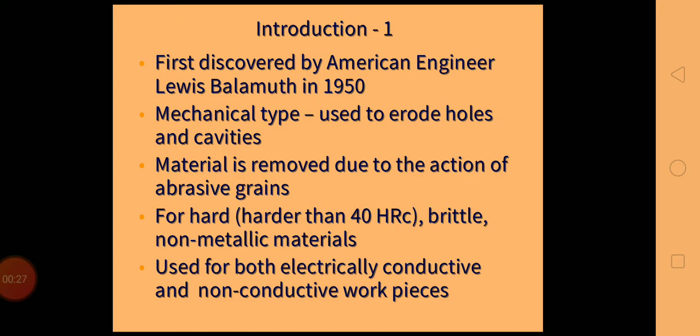Second, the tool holder, also called a tool cone or acoustic head. The main purpose of the tool holder is to amplify the mechanical energy produced by the transducer and transfer it to the tool. So the tool holder should have adequate strength. That's why it's mainly made of titanium, monel and stainless steel.

Third is the abrasive slurry. In slurry, the abrasive should be harder than the material being machined. The abrasives mostly used in ultrasonic machining are aluminum oxide, silicon carbide and boron carbide. Along with the abrasive, a liquid medium is also used. The main purpose of the liquid medium is to carry the abrasive to the cutting zone and carry the spent abrasive and chips away. It also acts as a coolant. Mainly water, benzene and glycerol are used as the liquid medium.

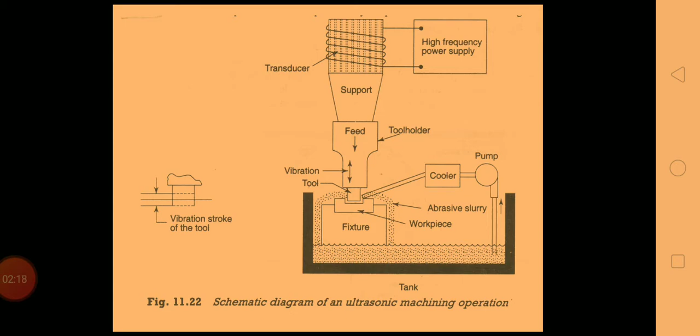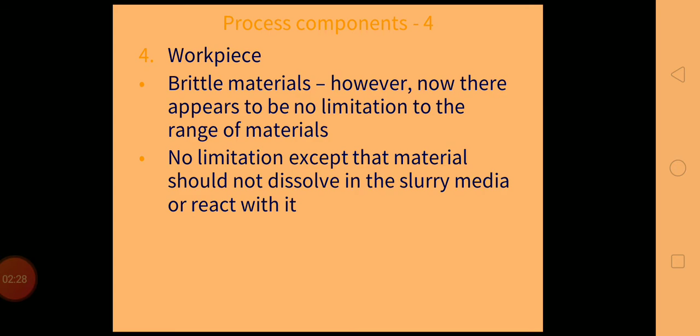The workpiece is generally a brittle, hard, electrically conductive or non-conductive material in the ultrasonic machining method. So now we can see them one by one. What types of transducers are used in ultrasonic machining? Generally two types: first is piezoelectric, second is magnetostrictive.

In a piezoelectric transducer, when electric current is applied to the piezoelectric material, it increases in size and returns to normal size when the current is removed. Generally piezoelectric materials are quartz and lead zirconate titanate.

Second is the magnetostrictive transducer. A ferromagnetic material subjected to an alternating magnetic field exhibits a change in dimension. This change in dimension is referred to as magnetostriction. When high frequency current is passed through the coil, the electromagnetic field changes, and the change in magnetic field produces a longitudinal strain in the lamination. This longitudinal strain is transmitted to the tool through the tool holder.

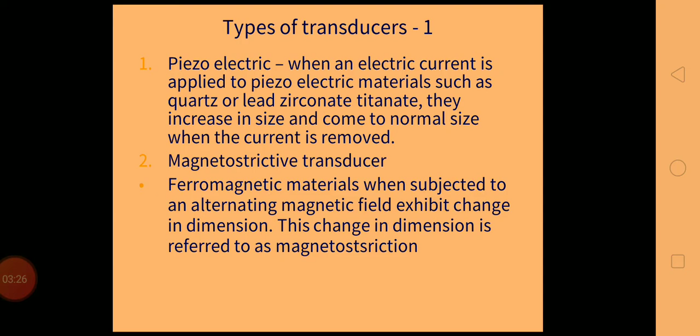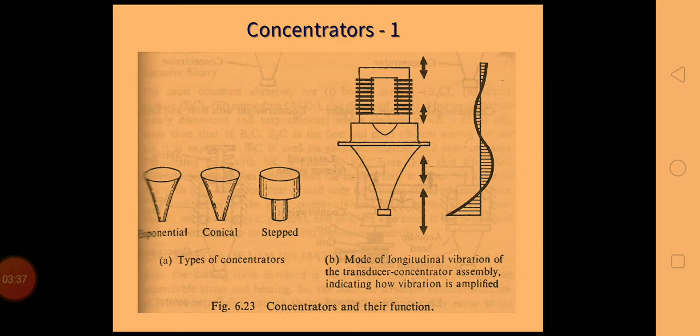Next is the concentrator. Three types of concentrators are used in the process: exponential, conical and stepped. The concentrator provides the link between the transducer and the tool. It's generally called a mechanical amplifier, also called a resonator. The main purpose of the concentrator is to increase the amplitude to the level needed for machining.

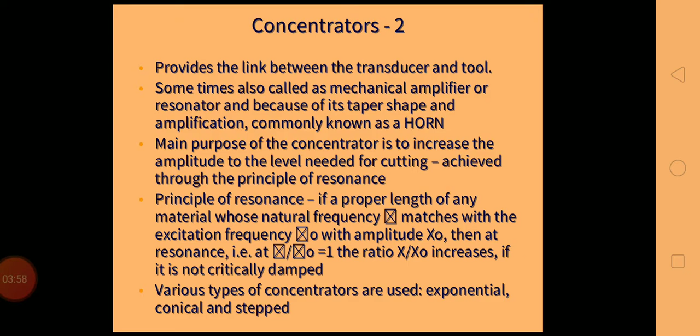What are the factors affecting the ultrasonic machining process? Generally five factors affect ultrasonic machining performance: the machine, workpiece, abrasive slurry, tool and working conditions. The machine should have adequate stiffness, rigidity and strength. Workpiece properties such as ductility, hardness, strength and compressive strength generally affect the performance.

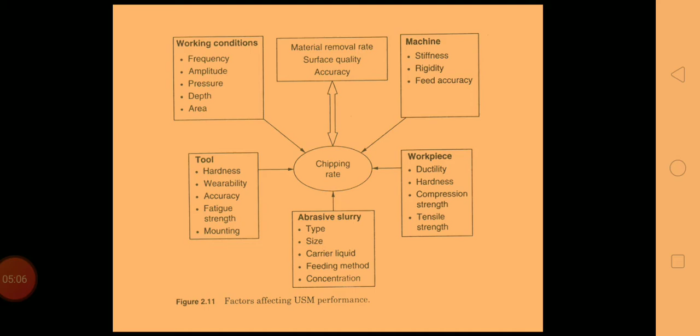Abrasive slurry means the type of abrasive, the size of the abrasive, the liquid medium, the feeding method and the concentration used. Fourth, the tool: the type of tool, tool material, hardness and accuracy. Last, working conditions: frequency, amplitude, pressure, depth and area. These are the general factors affecting ultrasonic machining performance.

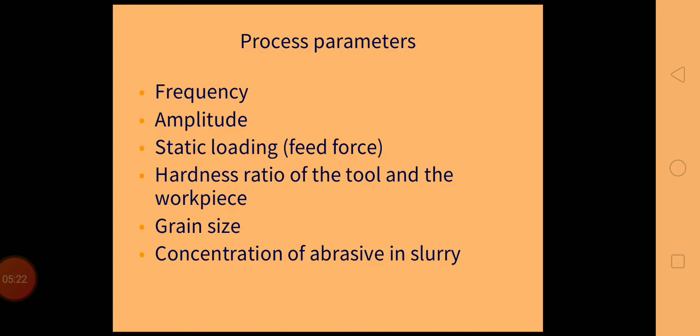The main parameters involved in the ultrasonic machining process are frequency, amplitude, static loading, hardness ratio, grain size and concentration of abrasive slurry. What are the advantages of ultrasonic machining? It is used for machining hard and brittle materials to produce complex shapes with good accuracy and reasonable surface finish. The process is not affected by electrical and chemical properties.

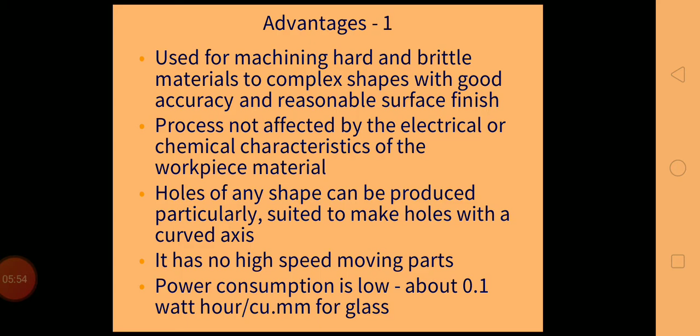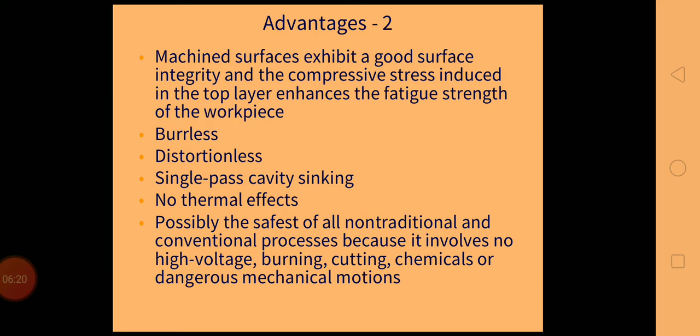Holes of any shape can be produced, and making holes with a curved axis is also possible. It has no high speed moving parts and power consumption is very low. The machined surface exhibits good surface integrity, and the compressive stress induced in the top layer enhances the fatigue strength of the workpiece. There is no burr, no distortion and no thermal effect in the workpiece. It is possibly the safest of all non-traditional and conventional processes because it involves no high voltage, burning, cutting chemicals or dangerous mechanical motions.

The limitations of ultrasonic machining: the material removal rate is very low, the depth of hole produced is limited, and tool wear is high. Sharp corners cannot be produced. Flat surfaces cannot be produced at the bottom of the cavity because of ineffective slurry distribution. It is also not economical for soft materials; it is mainly used for hard and brittle materials only.

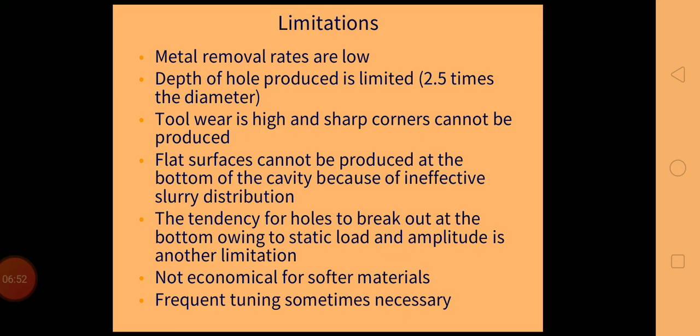Applications: tungsten and other hard carbides and gemstones such as synthetic ruby are successfully machined by the USM process, and coining operations are possible in glass and ceramic materials. Threading in glass and ceramics is done by appropriately rotating and translating the workpiece and tool. Manufacture of hard alloy wire drawing, punching and blanking dies is possible in this process.

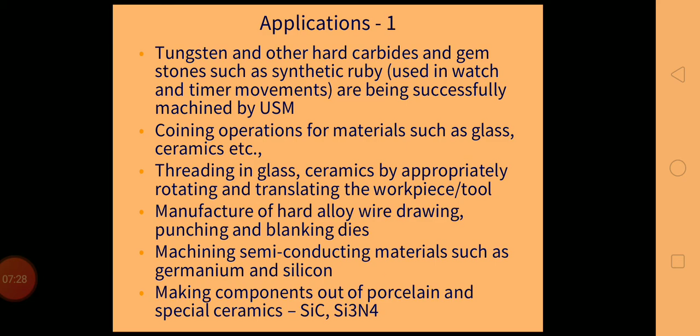Machining semiconducting materials like germanium and silicon is possible in the USM process. Making components out of porcelain and special ceramics is also possible. Holes of any shape can be produced with simple tools. The USM process also offers significant improvement in the manufacture of graphite electrodes over conventional techniques.